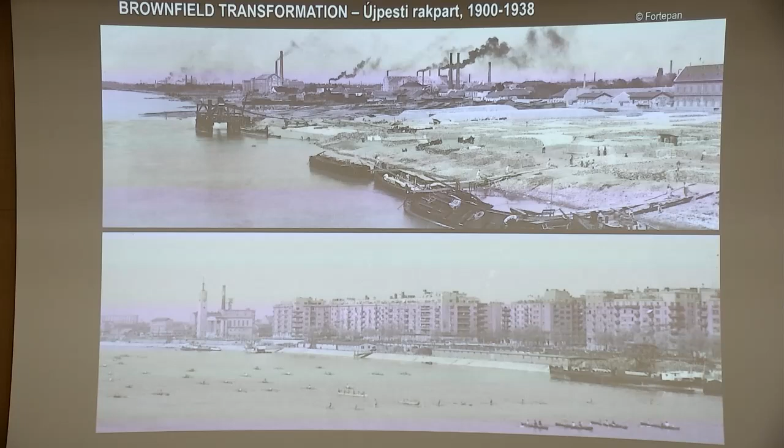As a matter of fact, the city has always developed brownfield areas. On the picture you can see the same site, 30 or 40 years apart. The first was made at the turn of the century, and the second is from 1938-40, when a completely new residential area, the most prestigious residential area, was developed at that site.

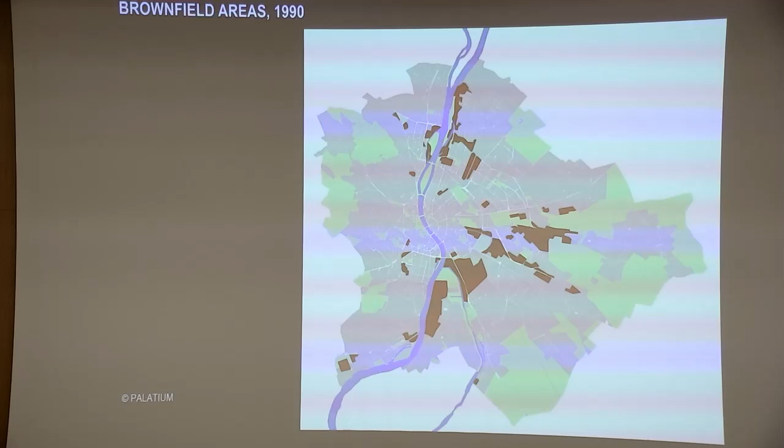When we really found brownfields, this was at the 1990 turn of the political system. At that moment in Budapest we already had abandoned railway areas, rundown factories and workshops, and empty barrack areas, and we had all the problems of this situation. Of course, on a spontaneous way, simply using the forces of the spaces and the energy of the city, a lot of brownfield areas started to revitalize and remodel themselves.

And just as you already told us, what are the advantages of brownfields? They can balance the urban structure. They are a basic element of the compact city, offer a new place for new functions, and we sometimes forget that they offer a large space for green areas as well. They also give the opportunity to clean up our thoughts and our legal background around certain points of the city.

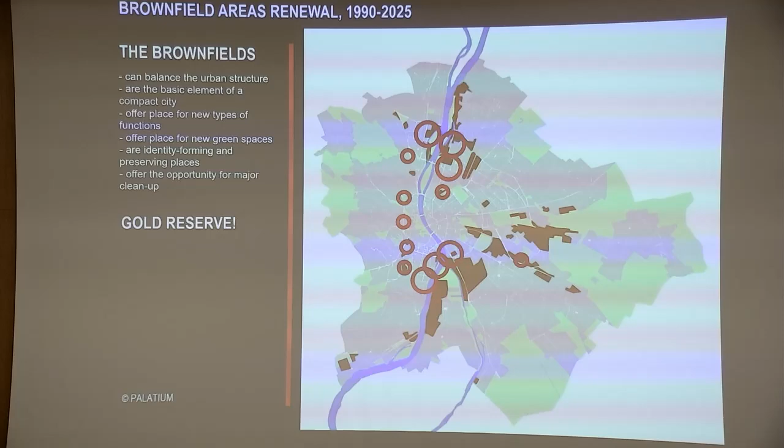Early successes began at the Váci Street area. Váci Street is a road going north from the city center, and they had a lot of factories on the road. But the factories had no well-maintained public transport, so the new metro line number 3 was constructed just at that time, at the end of the 80s, early 90s.

And it came out that we had the new metro line, but there were no workers, the factories ran down. The metro line gave the possibility to create a very good office corridor—we call it the Budapest Office Corridor. These years brought complete changes for that area.

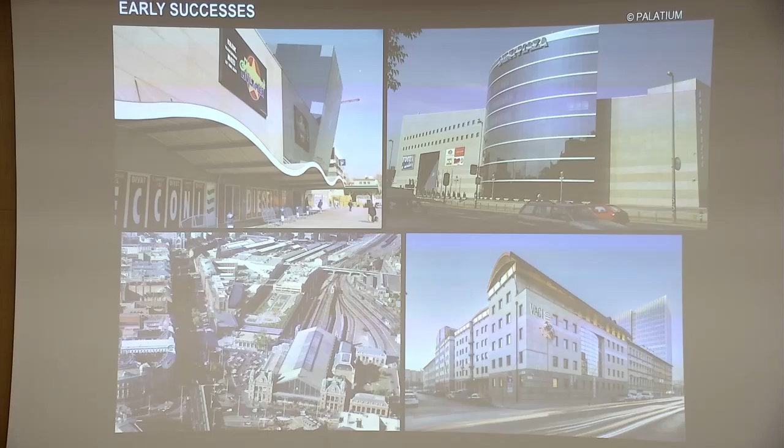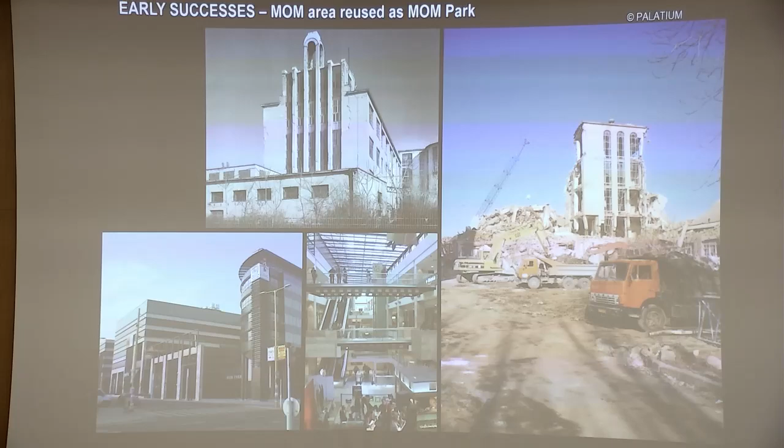Another early success, as you see on the sign, is in central Buda. Buda is the most prestigious part of the city, and namely this inner part, so it was normal that factories couldn't stay anymore. It was an optical instruments factory which became reused on that place very early. By the end of the 90s, we already had a shopping mall and a residential area in this place.

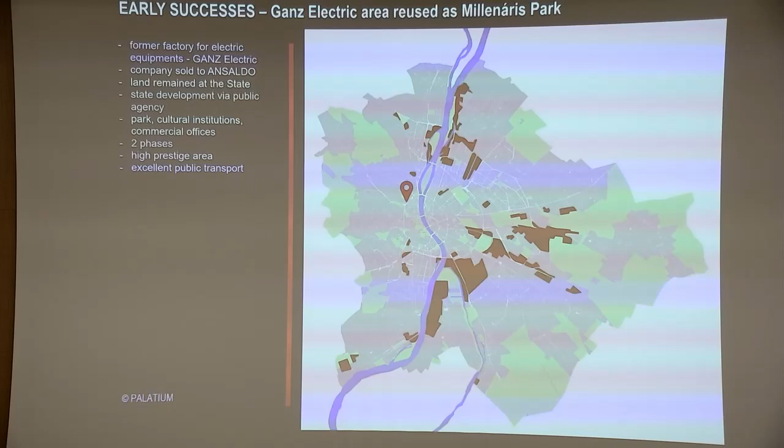Another early success was another Buda site. The Ganz Electric factory was privatized, but at that time privatization went in a certain way where the state took back the site and the land, and privatized only the company itself. On the land, the state made a very important project—the first urban government project in 1998—where they demolished the unnecessary buildings.

They kept the characteristic industrial buildings and constructed cultural venues and programs, a dance theater and exhibition halls, etc. Finally, in the second phase, they created a huge city park, which in this prestigious area is a very large gain for the city, in this beautiful place.

Another success, even if we don't call it an architectural success—our new National Theatre and other cultural events are on former industrial areas, brownfield areas. I have to say I am very happy when we have brownfield renewal for industrial purposes. There's a pharmaceutical company called Richter, which has its headquarters and R&D center on its former site, and there's Bosch, which constructed a new R&D center.

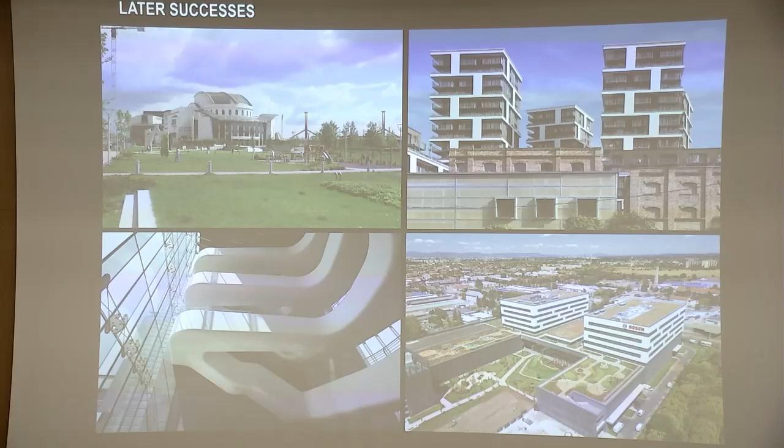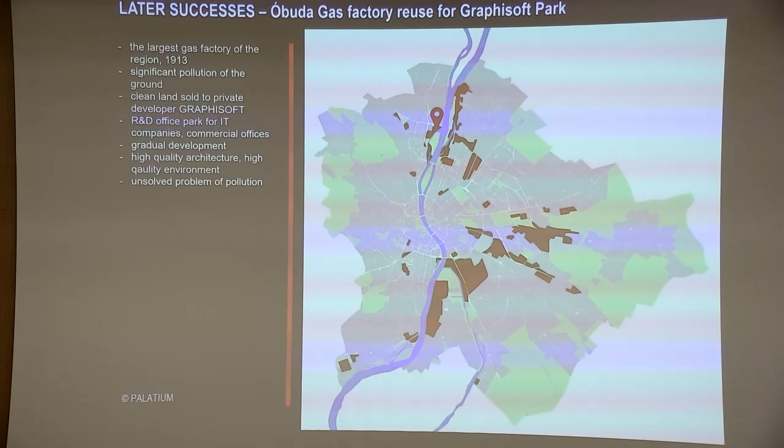Later successes: we have quite a huge area full of engineers and software developers, called Graphisoft Park. Originally, that had been the largest gas factory in the region, built in 1913. It was really a very important, and at that time very modern, factory.

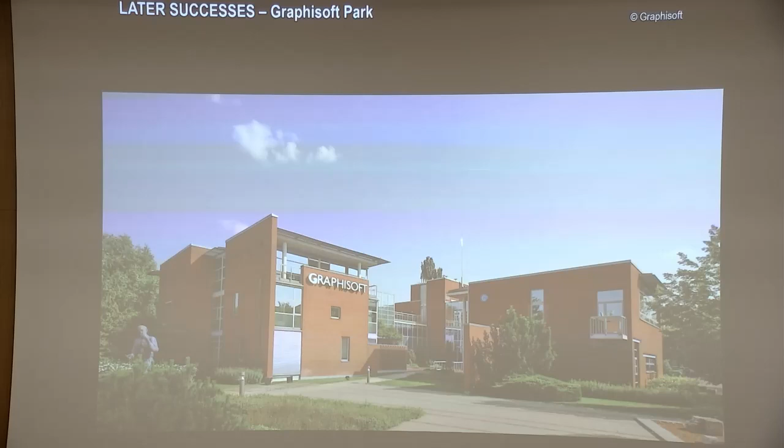Of course, we don't use this kind of gas anymore; we use natural gas, so the old gas plant became empty and unnecessary. Step by step, the company Graphisoft, which architects may know from the Archicad program developed here, became a real estate developer. They produced a beautiful park full of buildings constructed by different Hungarian architects of high quality, and made from the gas factory a well-maintained and well-developed park we can call a science park.

The story ended at that point because the problem of pollution in the soil could be handled on 80% of the area, but on the remaining 20% we have very heavy and very expensive pollution. Up to now, the land belongs to us, the capital city of Budapest, but the pollution belongs to the state. We wait, and we have court decisions saying they have to clean it.

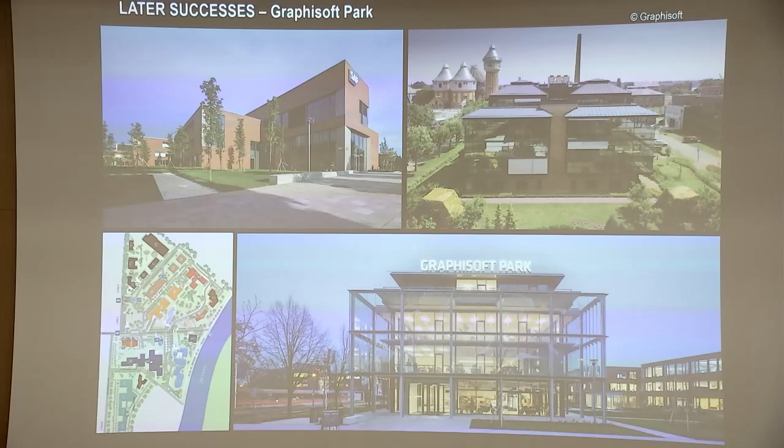The problem is that it already endangers the Danube, because this black substance is going down into the water. This is one of the greatest issues I want to underline, that it can be a very strong obstacle for development of this size.

Another success which is under construction is Buszesz. It was a factory for creating alcohol synthetically a long time ago, but you see it is a beautiful waterfront site. On the other side of the Danube branch there's an island full of wood, and it became one of the most successful developments. It is already in that condition.

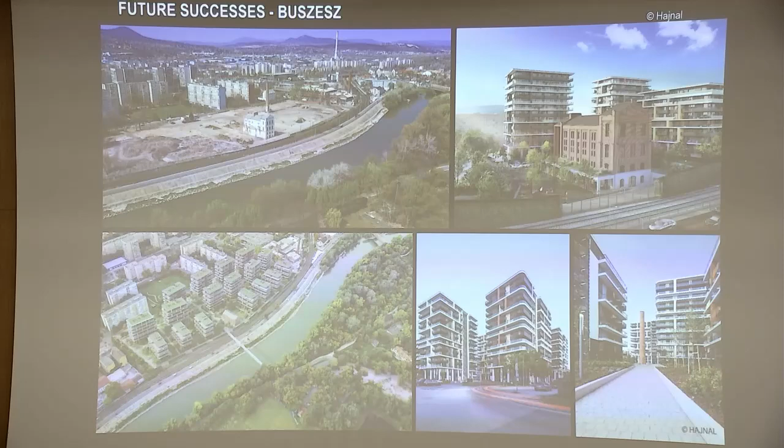Of course this is only a picture, but this is the present situation. That's what I tried to explain yesterday, even if we like it—another place on the south of the Danube is this oil company's tower, the highest building in Budapest or in Hungary, 140 meters.

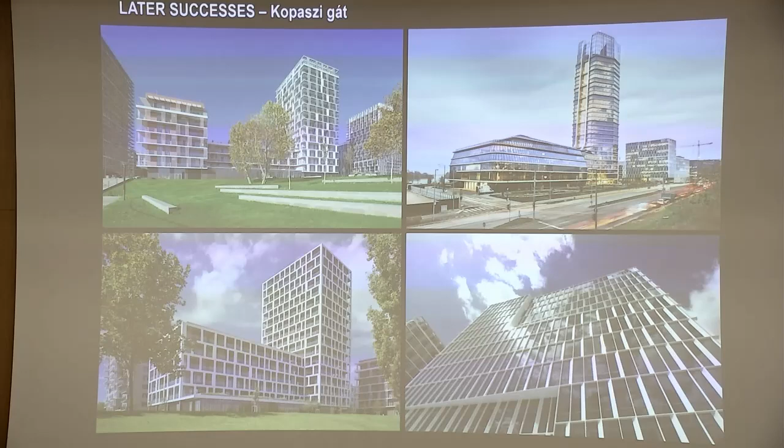The question is who lives here and who can afford a flat in that building on the top. I have to tell you it's not the chief architect and his family. So we don't understand at the moment how these high quality, so-called luxury flats can fill all the brownfield areas, or what will happen with that issue. Can we make cheaper or simpler flats as well?

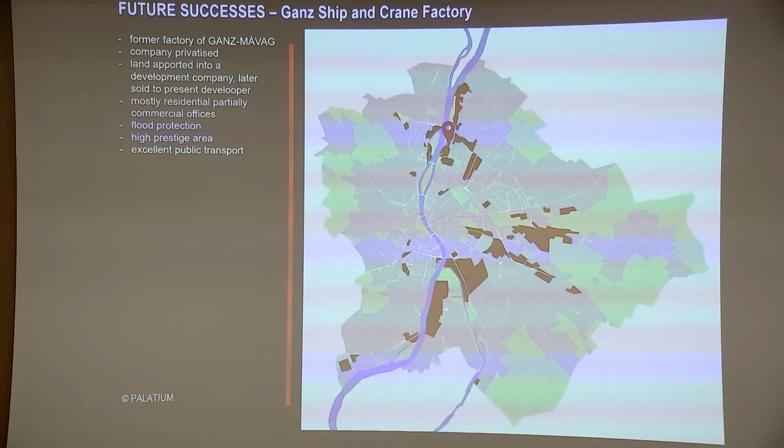Another project under construction is at that bay, once again a Danube waterfront site. It is the former ship and crane factory. Perhaps you know that even in Rijeka we had huge cranes earlier.

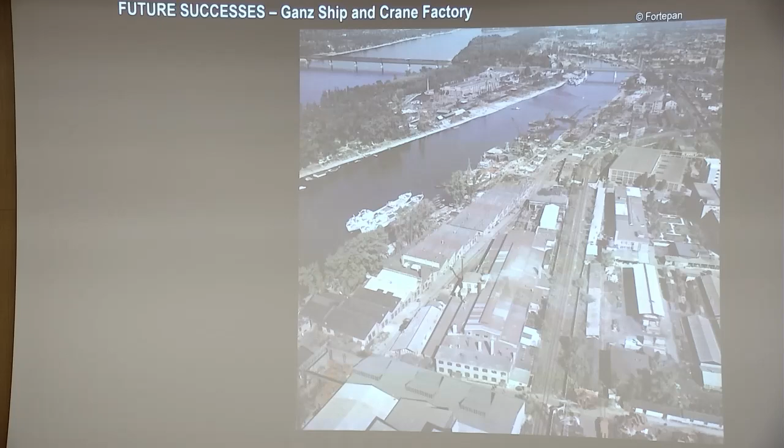What happened here is that in 1990 the site was separated from the company. The company went bankrupt, the site went through different hands, and now they are constructing the first buildings. It is quite a typical answer at the moment for development in Budapest.

A building on the ground floor, 100% garage. We have the highest possible building here—65 meters, so nearly 20 stories high.

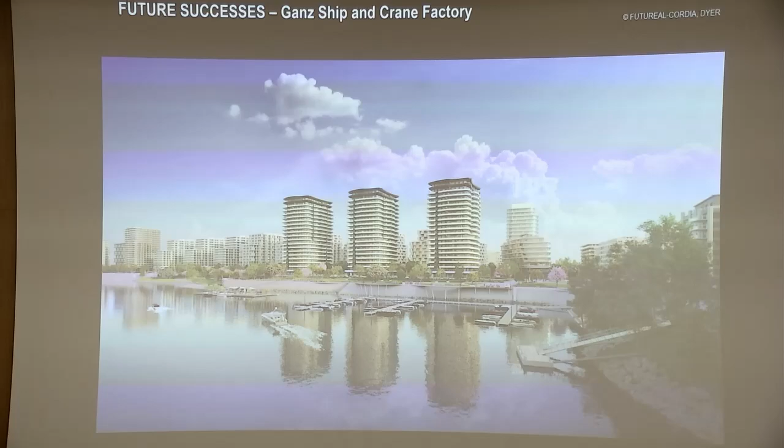Of course, the developer wanted to construct all along this line with these buildings. Together with them, we tried to make a kind of composition: let's have a higher block at the beginning, lower blocks in the middle, and once again a higher one. So the architectural or urban composition is already a matter of negotiations and intentions.

I have to tell you that chief architects cannot manage too much. If developers want to fill up the possible heights, they will fill up. If they want this kind of architecture, there is no way to control them. Of course I try to control it in a personal way, and we discuss possible solutions, but it is only an intention, not an obligation.

What matters is that they spend money on this dam system—it's a missing part of the inundation dam, and they will construct this with private money, but we asked to keep it public.

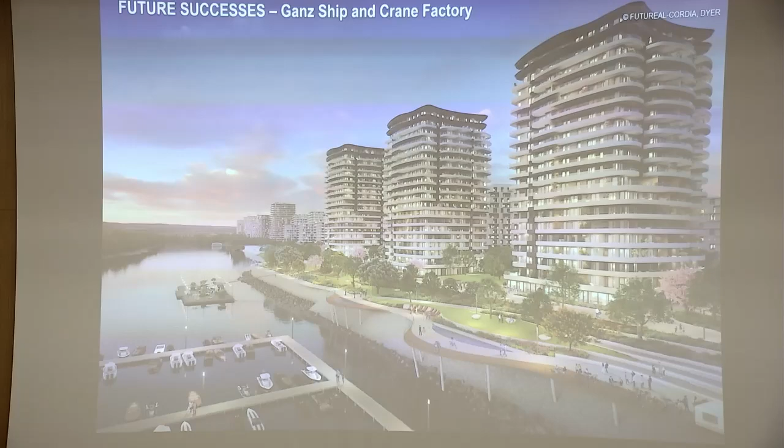But anyhow, it is not an idea like what we have heard about Barcelona, that you have to keep this or that percentage of affordable housing. We try to use these elements, but not in that percentage and not in that complexity we heard about before.

Another future success is a chocolate factory in the 9th district, which will be developed in the backyard where there are no important or valuable buildings. They will construct a residential program, and in the front they will construct an office program.

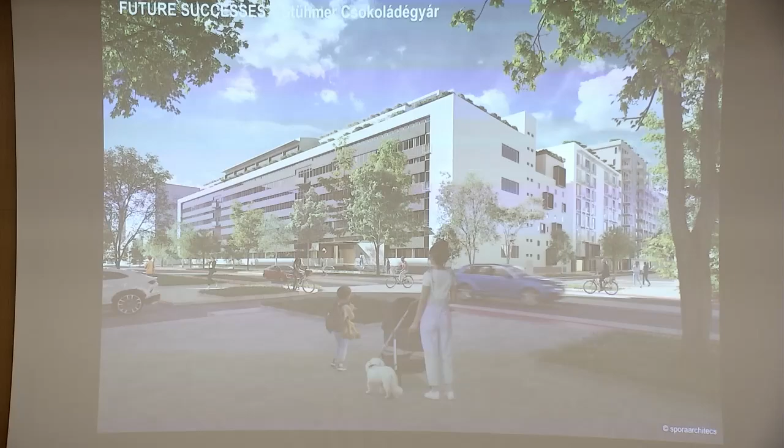It is a Ukrainian investor, and it seems that they understood the requirements, and they agreed to deal with this listed building. The problem is that from this listed building, which could have been beautiful, we shall see one of the worst failures in Budapest.

I want to show you a multifaceted problem area, the Kőbányai Road. It has in itself 4 different areas I want to show you. It is not on the Danube bank, it is not in the prestigious areas. It is a very rundown and problematic area in Kőbánya.

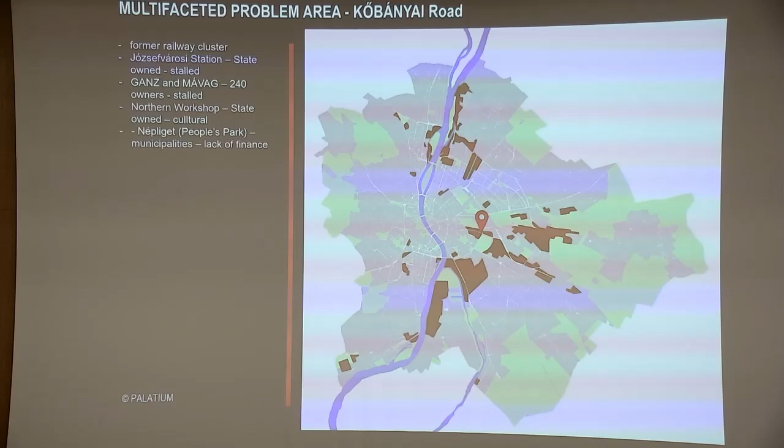Just to understand, I have this picture. This is a former railway station, the so-called Józsefváros railway station. This is a huge factory, the so-called Ganz-MÁVAG, and here we have workshops. But this is an outskirt of Budapest. It is not nice to walk there, and it is just a good example of those brownfields that should be urbanized because they are in a good position, close to the city center, on areas with public transport and public utilities. So one should do something with this, but it is not so simple.

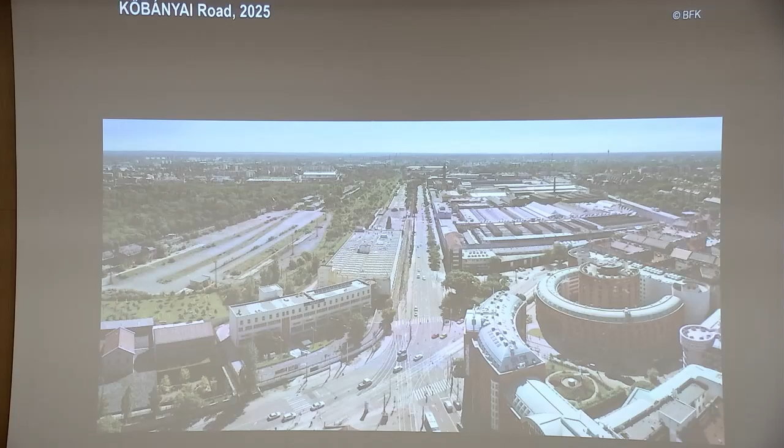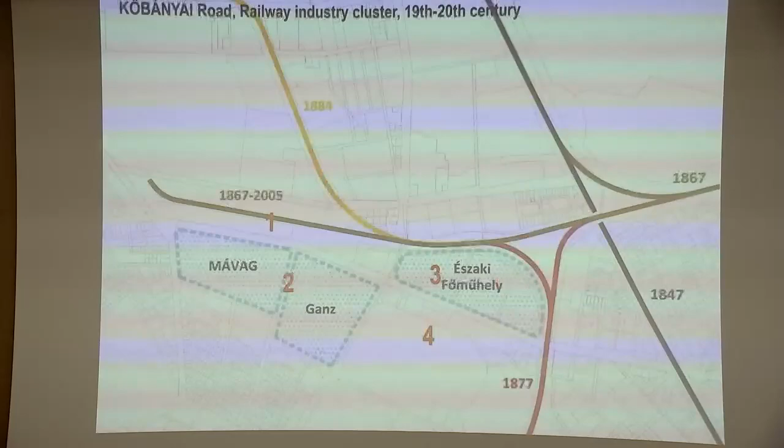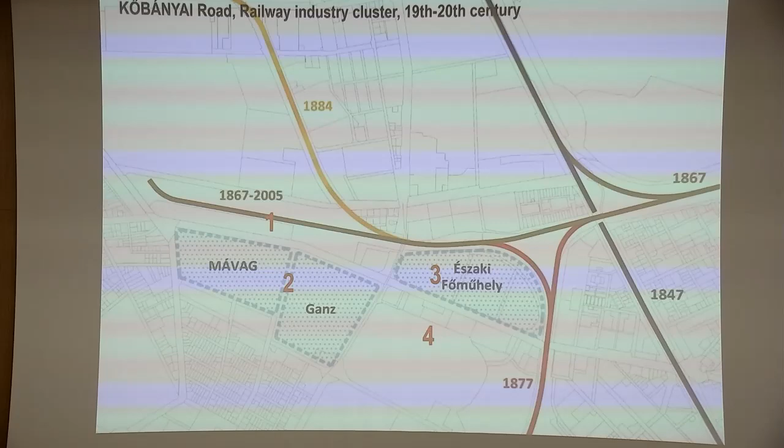To show on this map from 1877, here is the railway station. Here are the first factories for railway cars and engines. Number 3 is the workshop for the state railways, and 4 is a place for a large park. You can see here the very first railway, the second railway, and it somehow developed into a network, and the area became a kind of railway industry cluster.

The old station is now a museum, a Jewish memorial center, House of Fates, which is correct and has got a correct renovation, but unfortunately the exhibition is not open at the moment because it is not finished.

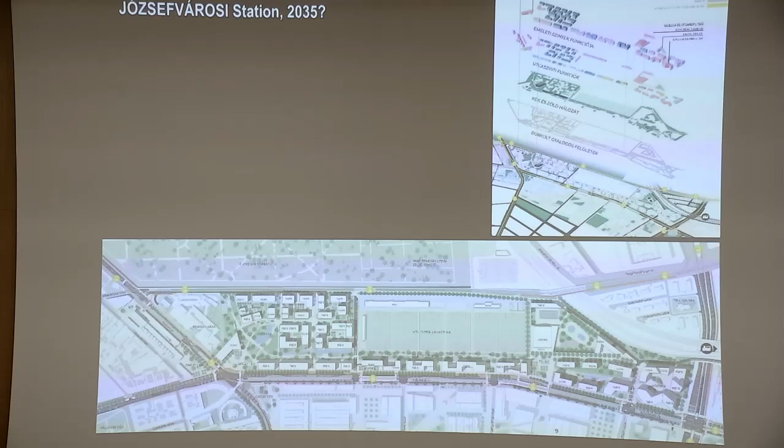On the site of the station, there were quite good proposals to have an urbanized area. This was made by a state agency, the Budapest Development Centre, where they proposed a series of offices and residential area. The problem was that on this area, they had to accept a football academy. The football academy is a very important thing in Hungary for political reasons, but it is not a real urban challenge. You know, the problem is that it looks green, but in reality this is plastic.

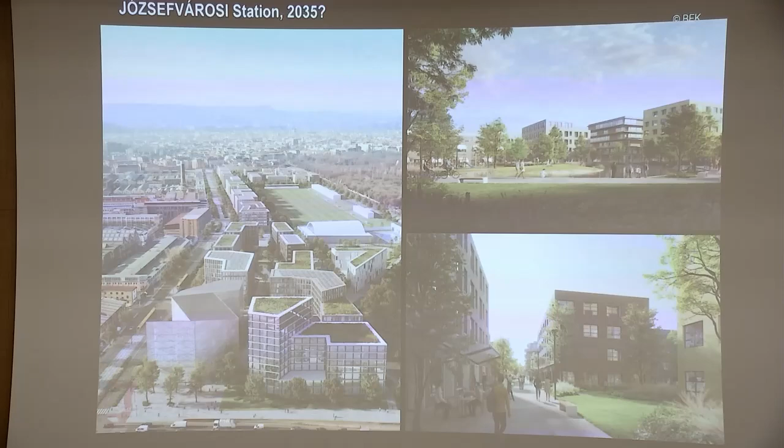And we absolutely don't like to have this kind of use because it is once again a monofunction for a large area. So that was the proposal for this residential area, but unfortunately it has not begun.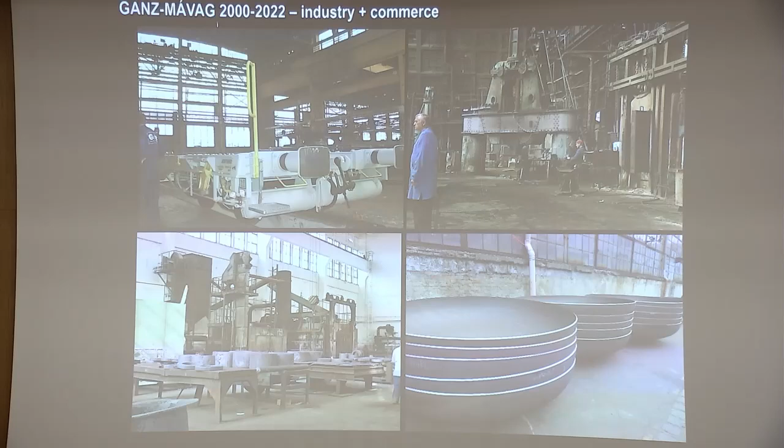So we were present in the world, but by 2000 it was so run down that only those heavy machines which couldn't be taken out, or it would be too expensive to take out, still made some production, made some real values, but the area is in that situation.

And it became the largest Chinese, Vietnamese, Turkish market of Central Europe. You can buy everything, a lot of everything, so the prices are defined at one, two, and a lot. You can see this quite interesting picture of vans for transit with no signage - no company name, just white vans with brown boxes. You don't know what is in the brown boxes because there is no sign of that. And this has worked now for a decade.

The huge halls are installed with containers, and we don't know how many people live there because it is much more than a shop. We cannot do anything with that because there are 240 owners of the area. The plot was somehow sold to different private and Chinese private persons, and you cannot handle this system, neither on the municipal level, nor on the state authorities level. So I'm afraid that we cannot call it a successful area in the future.

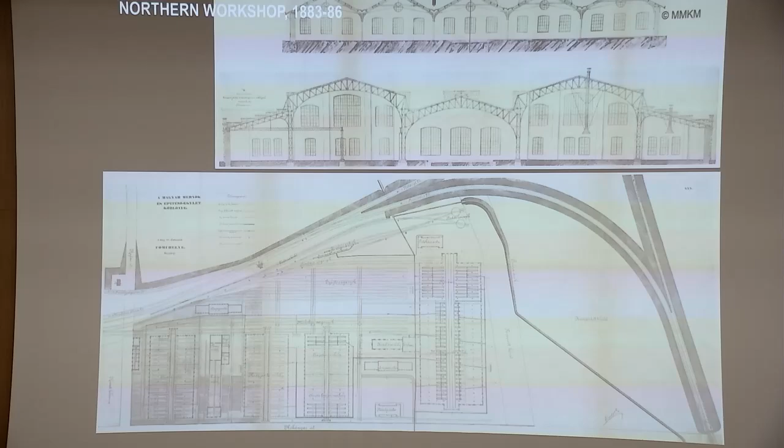It was used for steam engines, but later when the electric engines were introduced, they used it for that. And the so-called Eiffel Hall is this one. It is important. There was a theory that the Eiffel office had designed this, but it was not the Eiffel office, but somebody called János Feketeházy who worked in the Eiffel office earlier.

It is a 19th century workshop, and it became used for the Hungarian State Opera because they needed a new auditorium as well for some experimental musical performances. But they have their workshop, the costume workshop, the carpentry, etc., which is necessary. And we think that it was a very good idea because this cultural function brought a new urban approach to the Kőbányai Street.

What we wanted to extend later, just to the neighboring area, the so-called Diesel Hall. The Diesel Hall was constructed in 1962. Of course, the name explains what happened, that instead of steam engines, we had diesel engines, so we had to make a new workshop hall for that. And here there is the Eiffel Hall.

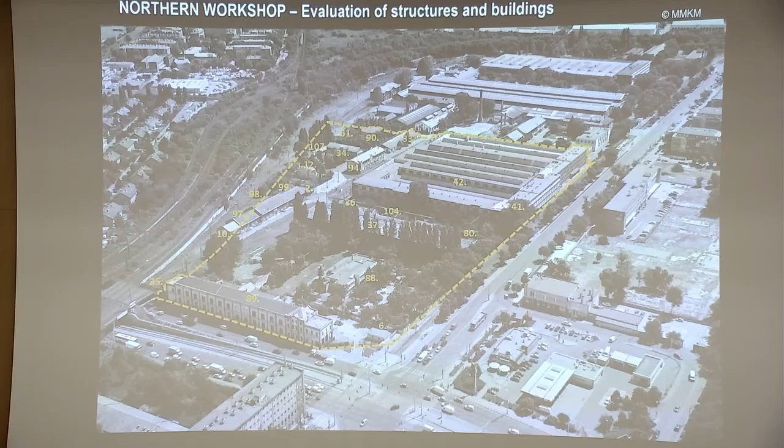And there was a decision that from the Diesel Hall, we are going to construct a new transport museum because the old transport museum in the city park was quite small, and it offered the place absolutely in a cultural context for this new function.

And it was a nice challenge, an interesting challenge, because we have seen so many 19th century riveted iron structures used for adaptive reuse ideas. But what to do with a reinforced concrete structure?

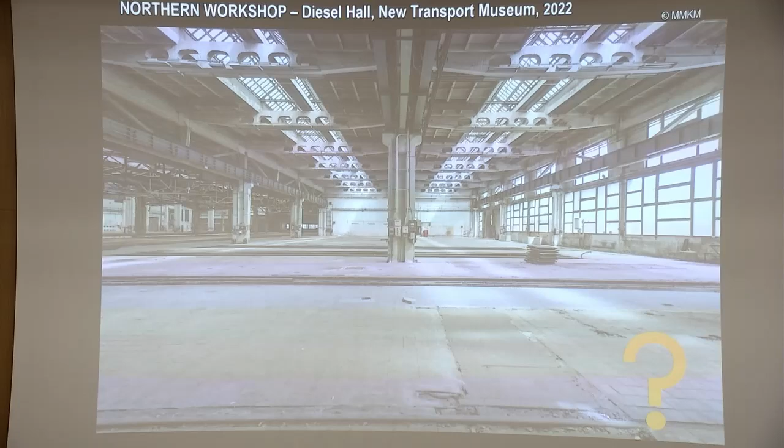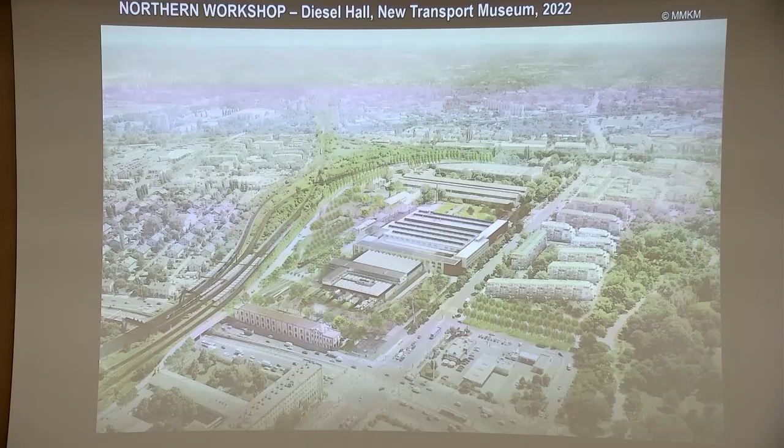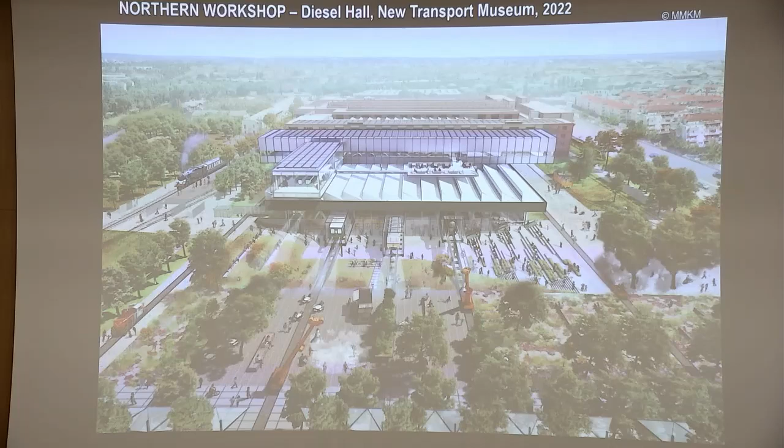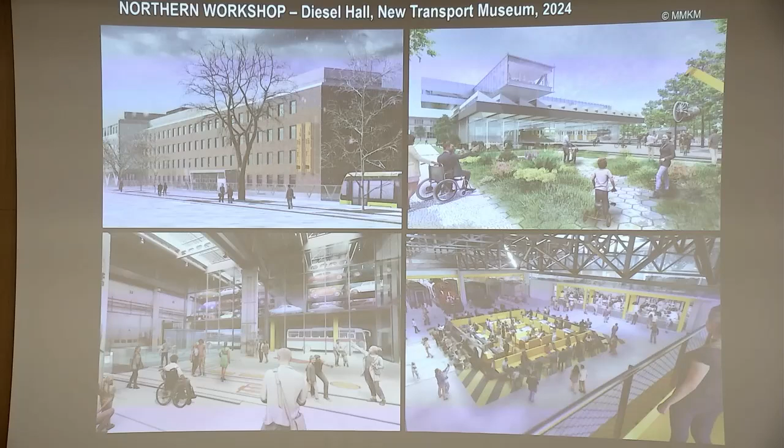But the process went on, and we have got an important international competition won by Diller Scofidio + Renfro, who made, after the competition, a complete plan and design for the future. We would be very happy to have this. At the very moment, there are some conflicts with the Ministry of Transport and with those who have made this. But as a partial success, I am very proud of that, because it would be a good idea to develop.

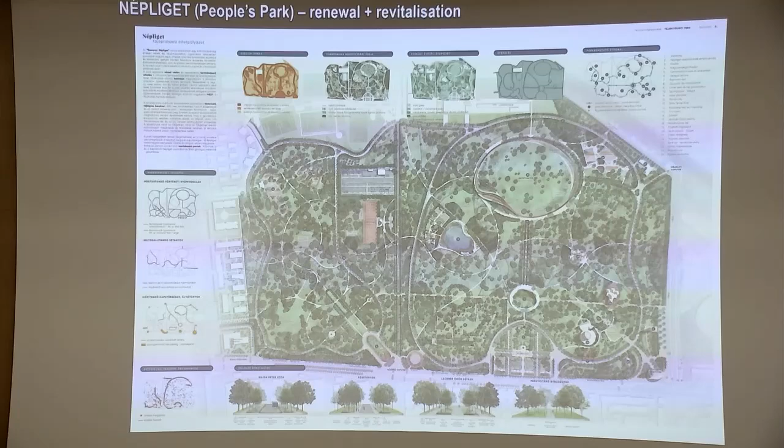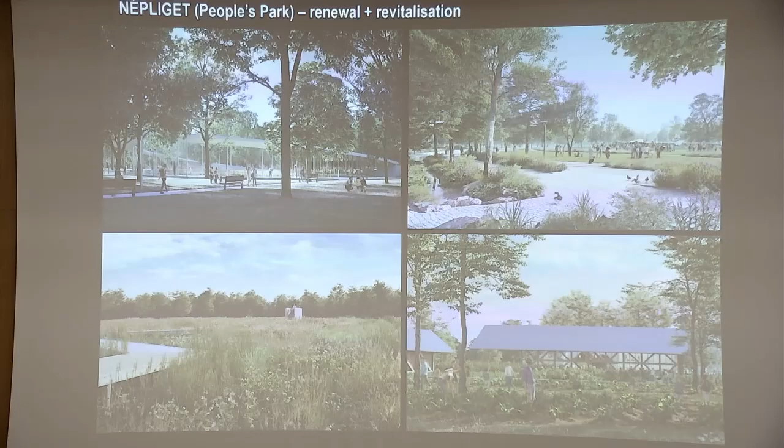The fourth area is People's Park. Once again, we had a competition. It was not international, it was Hungarian. Of course, every competition is international, but it was mainly for Hungarian landscape architects. And we had a lot of new ideas about what to do with a historic park like this. We hope that it can be started step by step from now on, because this area needs refreshing and new ideas.

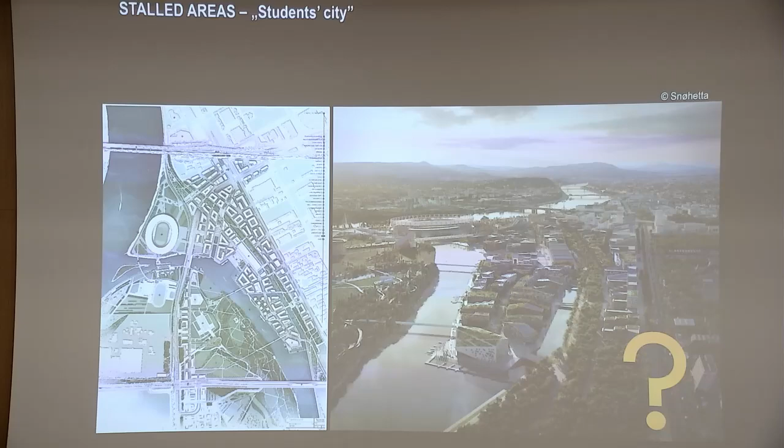There are the so-called stalled areas where we have already made a lot of steps ahead, but they are stopped. We like very much the student city on the south, on the Pest side. It is a nice site because this Danube branch is controlled by closures, and this is a stable water level area, and on that side the student city, which would generally be dormitories and cultural and sport facilities, could be quite a nice area.

As a matter of fact, the competition was won by Snøhetta, which is a Norwegian-Austrian company, but of course they worked with my Hungarian colleagues, and we were quite happy with this.

At the moment, we have a nice challenge about Rákosrendező marshalling yard. Rákosrendező is a railway area on that point, quite a long piece of land. And I will tell you a few stories about this, because the whole story explains a little bit the political background of the large-scale developments in Hungary, and you will find your own situation in this story.

As a matter of fact, this area was abandoned in the 90s, and it was standing alone. But once again, the story is that the Hungarian State Railway uses only these tracks, while these are empty, and even on this area they have already taken away the rails and the materials.

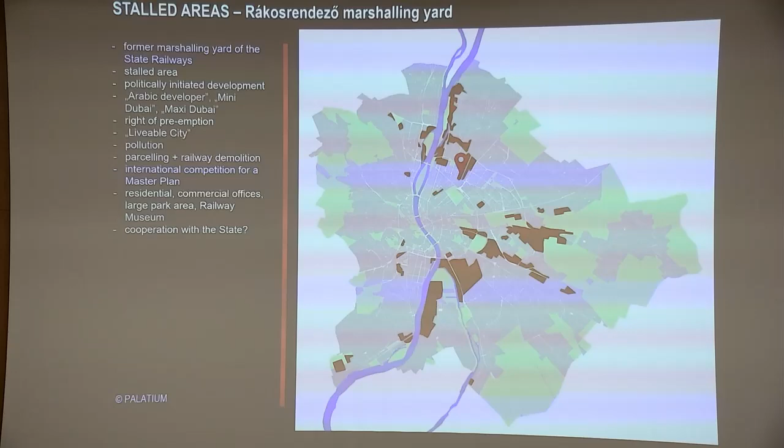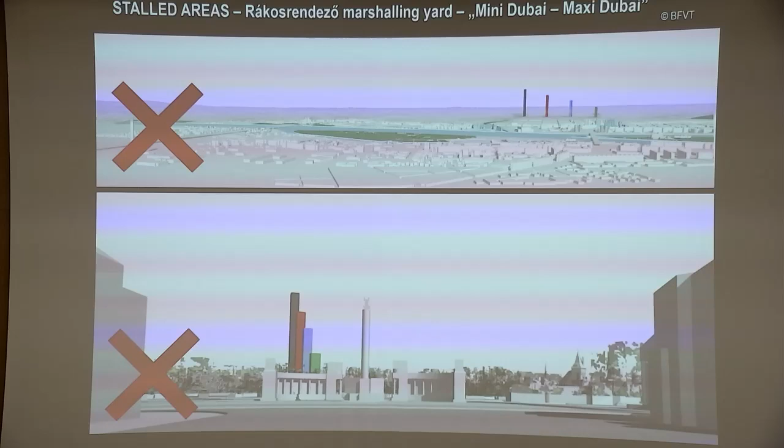The story at that point is that we can have the contract on the same conditions that were offered to the Emirates. And it came out that these were very favorable options - cheap price, a lot of promises for state developments.

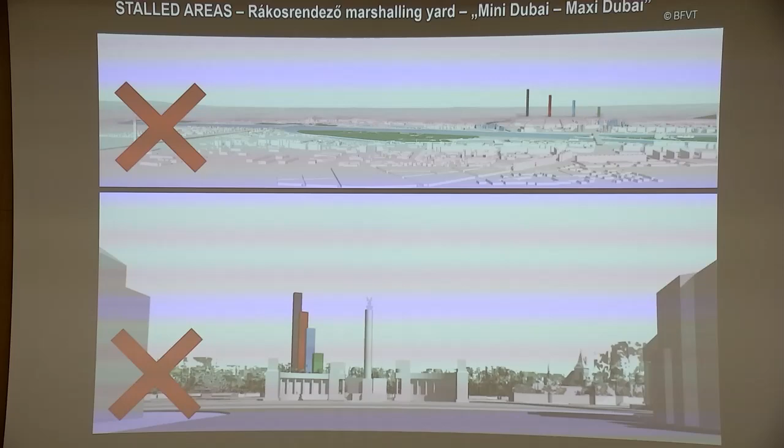This is part of the promise: a new railway station with connection to the tram system of the surrounding area.

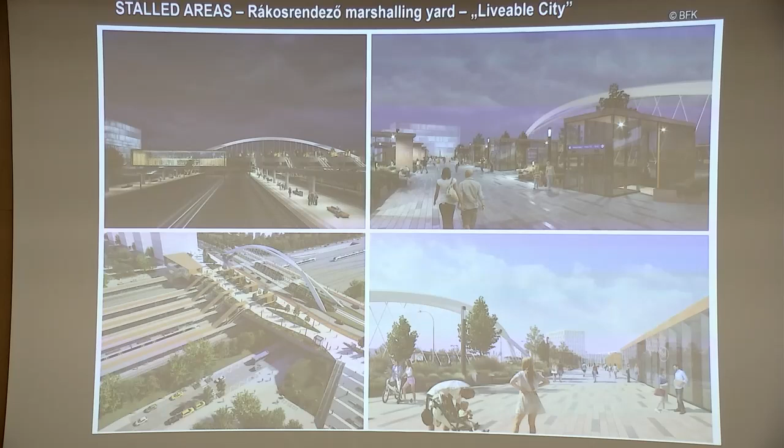At the moment, we are in the position that we have asked for this preemption possibility. We have got it, and we have got it on the same conditions, so the state should construct these things and give it to Budapest, because it was promised for the Emirates.

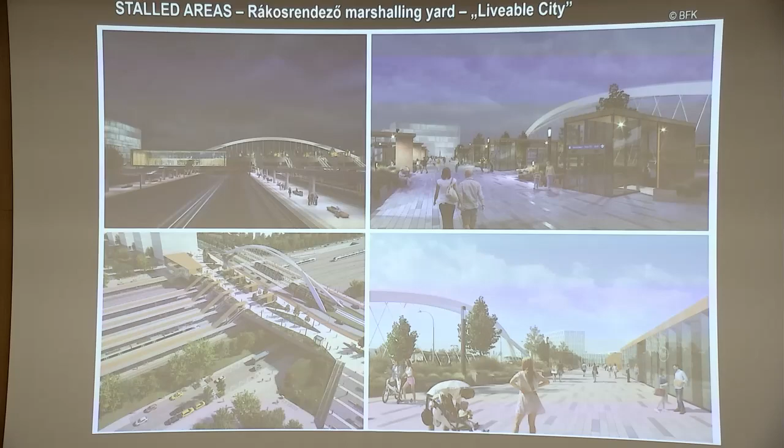Anyhow, what is interesting for you at the moment is that we are going to run the Liveable City competition, which is not only for that area, but a lot of the surrounding area. Of course it is not the solution of the competition, but it is the first sketch of how we are thinking about the possibilities and what are the real areas.

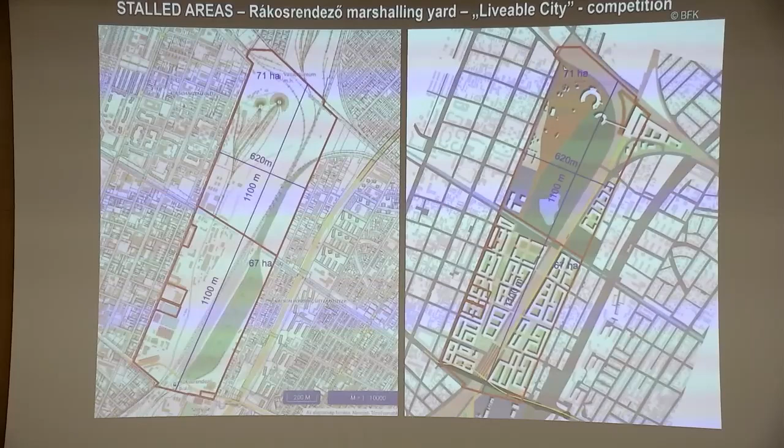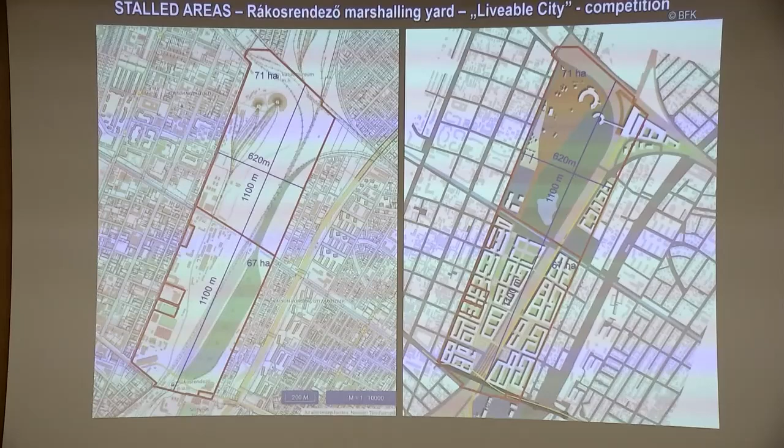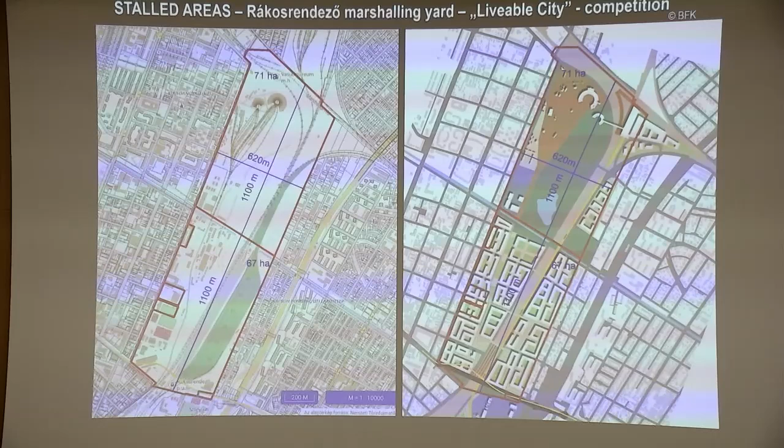That will be open in July. So if you feel that you want to participate, it will be a two-turn competition. In the first turn, you have to prove that you have references, economic background to make the project, and professional background. The second one is somewhere later in the autumn, when we shall collect the projects.

Just as I am going to finish my presentation, I want to summarize a little bit these stories.

What we have learned from the sites that were made up to now: it is very positive that they were pioneering the problems, and it is very positive that they already formed new poles, new subcenters, and that worked.

And it was just on the private way, not controlled by the city, but not too much investment in it.

We have innovative experiments, they are energy conscious, so those estates that are constructed now are absolutely nearly energy positive areas. Negative is the skimming - the best places are already chosen and constructed. What about the worst places? So they will stay behind.